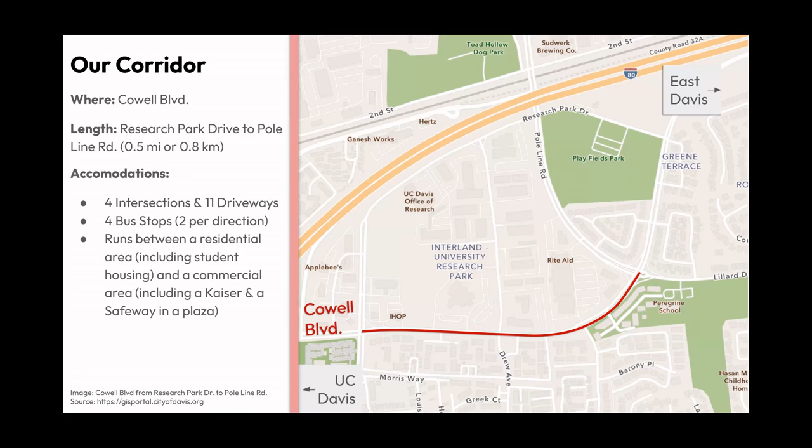Starting with the background, we would be redesigning Cowell Boulevard from Research Park Drive to Pole Line Road, which is approximately 0.5 miles or 0.8 kilometers. In that corridor, there are four intersections, which are at Research Park Drive, Drew Avenue, Valdora Street, and Pole Line Road. Throughout that corridor, there's also 11 driveways in from the residential areas and commercial areas.

And in that corridor, there are also four bus stops, two per direction, which students and locals usually use to travel to UC Davis or to East Davis. And talking about the students, there is a lot of student housing in the residential area, in which students often cross the road into the commercial area to access the Kaiser or the Safeway at the plaza.

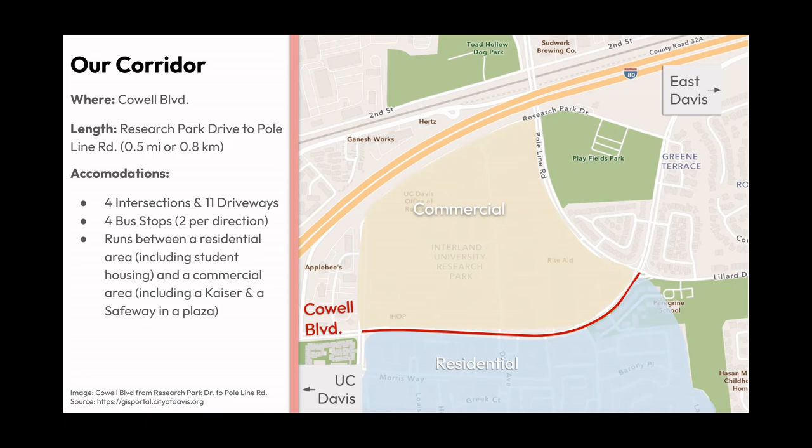Now, talking about the current status of the street, it is currently a 35-mile-per-hour road with two-lane traffic, one per direction, with a center turn lane, with the traffic lane being 17 feet wide and the center turn lane being 12 feet wide. Additionally, there is a parking lane, which is 8 feet wide, and an unprotected bike lane, which is 6 feet wide.

Now, talking about the walkability, based on walkscore.com, we found that it achieves a 73 for being walkable, a score of 41 for its transit system, and a high score of 94 for its bikeability, in which we found some of those points to be agreeable and some of them not, presented by Yuqi. We did find some defects in the current road systems, and we will talk about it in four different perspectives, from pedestrians, cyclists, buses, and cars.

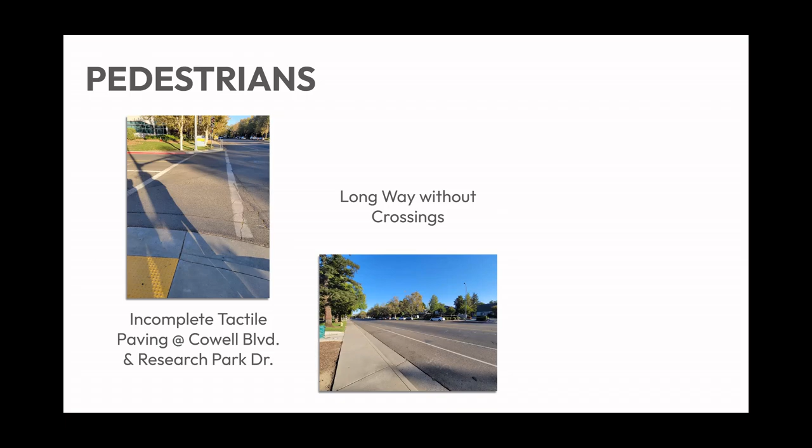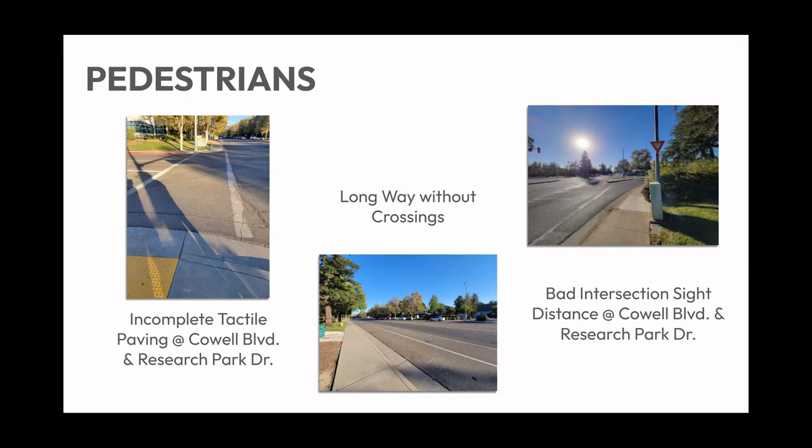And also for the motor vehicle driver, when they try to make a right turn at Research Park Drive, the huge landscape will definitely obstruct their sight distance, so they have to lower their speed to the bottom, so that has no impact to the pedestrian.

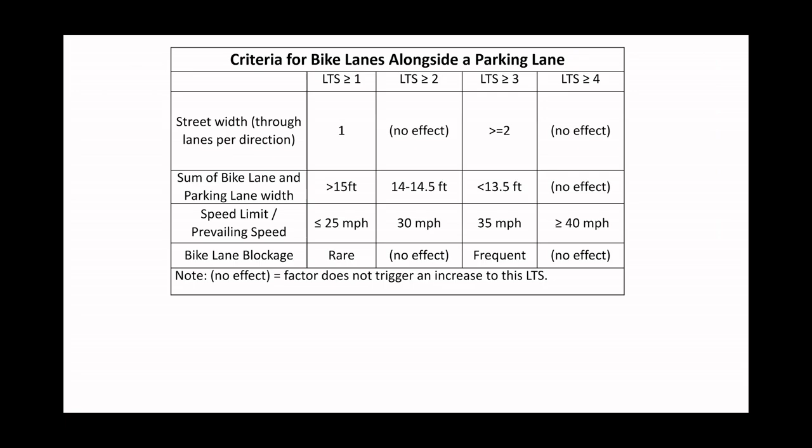And for the cyclist, as we measured, there's 6-foot bike lanes, and on the left side of it was a 35 mile per hour main road, which is the motor vehicle road, and that is pretty huge, uncertain, and through our measurement the bike level of service was at C, which is not quite good. And also, during our table and our calculation, the LTS was calculated to be larger or equal to 3, which disproves what Benjamin just mentioned, the 94 score.

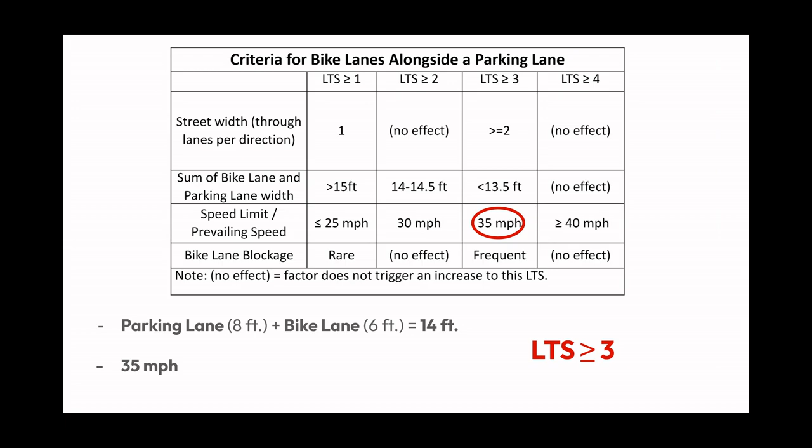And later for the buses, we point out two bus stops that need quite huge improvements. One was close to the intersection of Research Park Drive. It doesn't have shelters or any places to rest. And another one was near the intersection of Drew Avenue. The garbage was everywhere, and no public staff was responsible for that, and yeah, quite a mess.

And finally, for the cars, the vehicle volume at Research Park Drive was measured at 18,000 vehicles per day. That was a pretty massive amount, and also due to the downslope from the location of the bridge to Research Park Drive, there's quite a lot of vehicle speeding, and that's also one place to be noticed. And also on both sides, in the parking lanes, some of the heavy vehicles were doing loading and unloading. Yeah, that's also something to notice.

And Nicholas will talk about the new design of the roadway system. All right. For a look into the future.

What needs improvement? Firstly, pedestrian vehicle interaction. Secondly, bus stops. And finally, intersections. So what are our design goals for this project? We want to increase safety on roads and off, provide accessibility for everyone, and accommodate all modes of transportation.

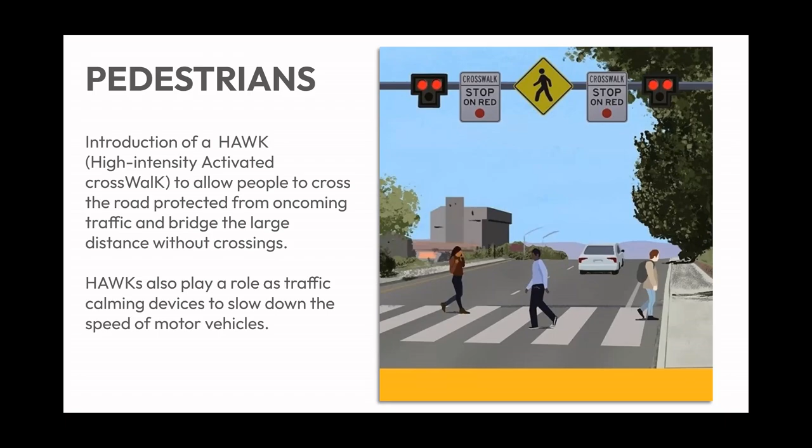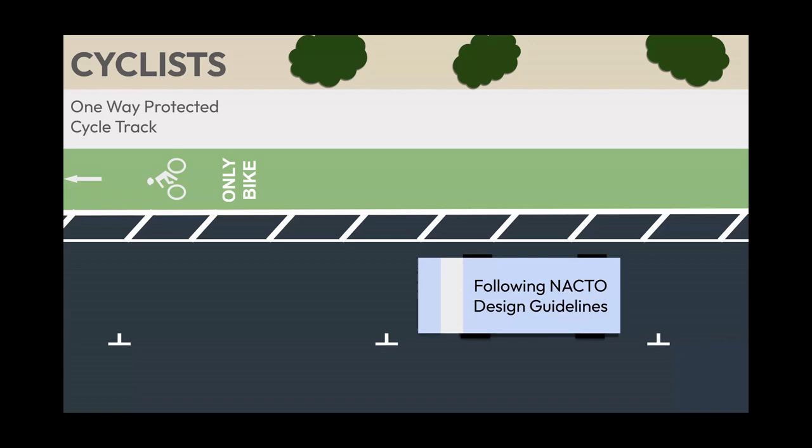For cyclists, we would like to introduce a one-way protected cycle track that follows all NACTO design guidelines. These include the 8-foot parking lane with a 3-foot buffer and a 6-foot bike-only cycle track. This would also decrease the LTS, level of traffic stress, down to 1, which is very good.

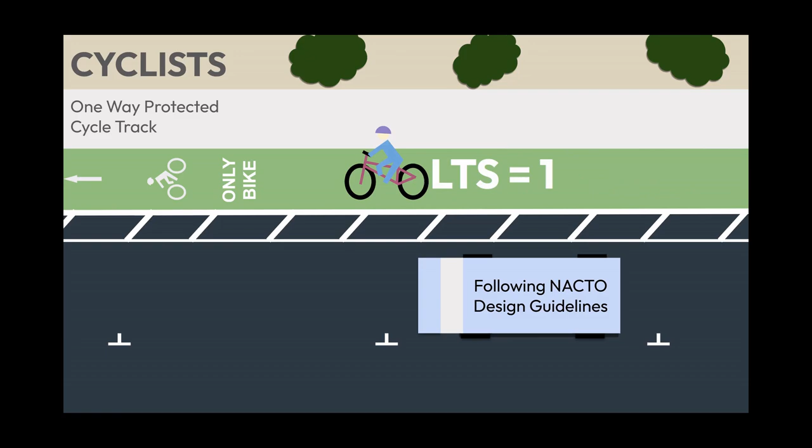For the buses, we would like to introduce a cut design that allows buses to park and pick up passengers without impeding oncoming traffic. We will start with the accessible pedestrian crossing that allows people to walk over the cycle track and into the transit shelter, which protects them from the elements. We'd also have bike parking and possibly shared micromobility, such as e-scooters or e-bikes.

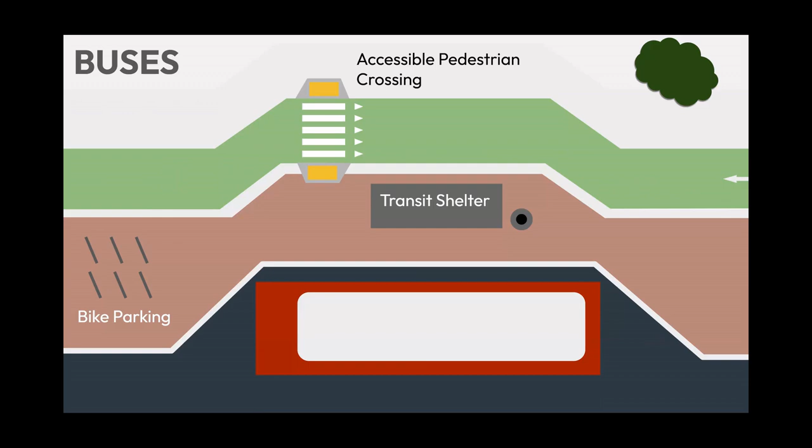For cars and trucks, we would like to have a median crossover with left turn bays, replacing the left turn lanes in the middle of the road before. This decreases the speed via vertical deflection and increases greenery into the road rather than a wide open lane.

We'd also have a road diet, decreasing the whopping 17-foot wide lane down to a more moderate 12 feet. This also could decrease the speed, but we would also introduce a speed limit decrease from 35 miles per hour down to 30.

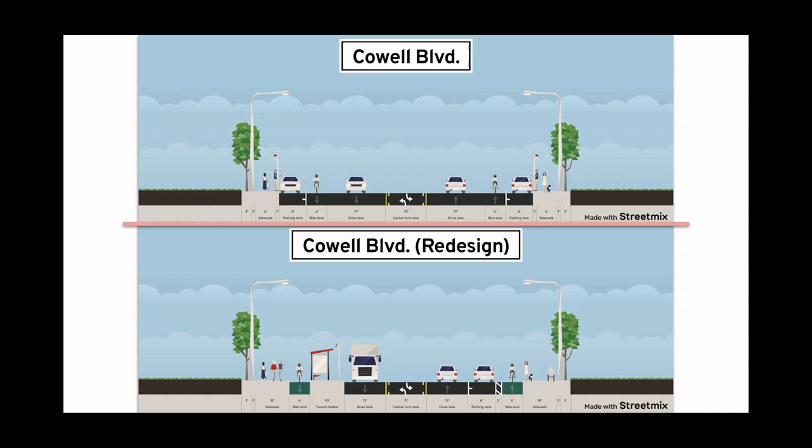For the roadway cross sections, this is the original Cowell Boulevard, and this is our redesigned version. Starting with the 6-foot cycle tracks, they would be followed by a transit shelter or parking lanes with a buffer. In the middle, we would have these reduced width drive lanes at 12 feet, and in the middle, a center turn lane or median. And now onto Jonas with the major intersections.

Okay, so now I will be discussing our intersection design. So starting off with our major intersection. Our major intersection is Cowell Boulevard and Research Park Drive. This is the northernmost part of our corridor. It is located adjacent to the on-ramp to the I-80 freeway, which is seen on the far left of this image. As a result of this juxtaposition, cars are traveling really fast coming into this intersection. So we want to introduce some traffic calming measures.

There is also no cyclist protection in this intersection. Additionally, this intersection is very large. The longest pedestrian crosswalk on the left is 109 feet, which is simply inaccessible for most people. And there is limited lighting, which presents a safety issue at night and at dusk.

So here is our design. We implemented a protected intersection, which will make this intersection a lot safer and more navigable for cyclists and pedestrians. As a result of this protected intersection, we brought the curbs in, so this will shorten the length of all of the crosswalks. We also implemented tactile boards and lighting. And we finally implemented narrow lanes approaching the intersection to act as traffic calming. So our lanes approaching the intersection go from the original 17 feet width to just 10 feet wide.

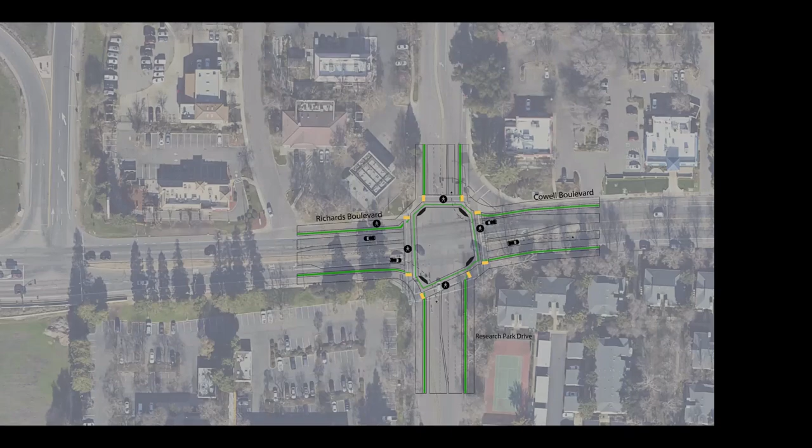And now moving on to our minor intersection. So our minor intersection is Cowell and Drew Avenue. This is one very long block south of the Research Park Drive intersection. Looking at the existing intersection, it's a little stronger in its existing condition than the Research Park Drive intersection. However, in the top right corner, we notice a lack of tactile paving. And on this right side, there's no pedestrian crosswalk. Additionally, visibility can be improved through striping.

So we decided to add another protected intersection here, as the symmetric shape of the intersection makes this design effective. Additionally, we added zebra striping to the crosswalks on all sides to enhance pedestrian visibility. We finished the tactile paving and ensured that it's all aligned in the direction of the crosswalk. And finally, what we believe is the greatest strength of our intersection design is how it flows with adjacent land uses. So we positioned the bus stop so that it's easily accessible for cyclists and pedestrians who are coming through this intersection.

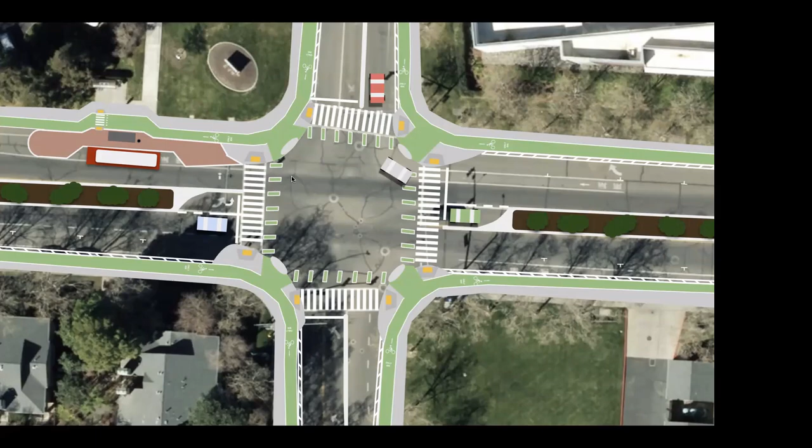So these are our proposed improvements, and through these improvements, we aim to make Cowell Boulevard a safer place for pedestrians, cyclists, bus takers, and drivers.